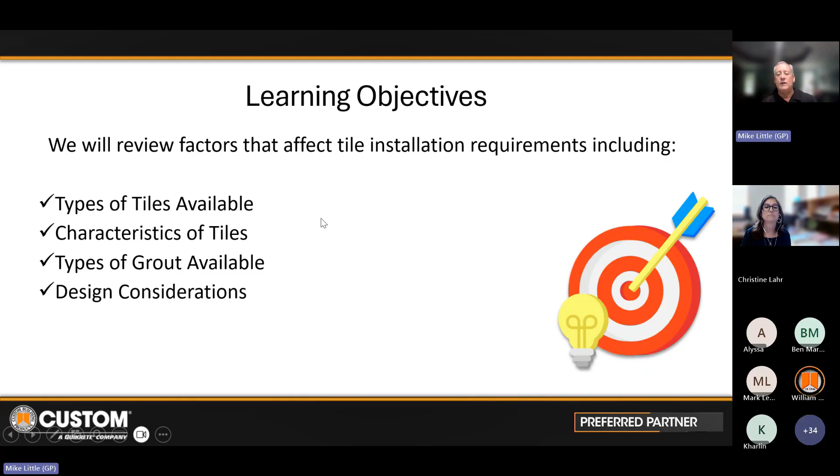For registering, you should receive a certificate of attendance. Some of the learning objectives we're going to take a look at are the types of tiles available to you, the characteristics of those tiles, the types of grouts available to you, and design considerations you might want to keep in mind as we go through these programs.

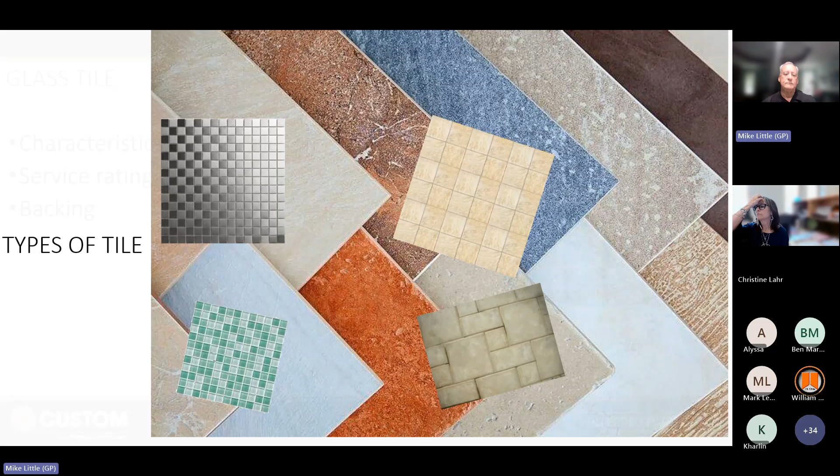One of the neat things about designing with tile in particular is that you have an almost unlimited palette to work with. You've got different textures, different colors, different styles, different materials. That's a great medium to put together. But in some cases, not all of the materials are installed exactly the same way. So I'm going to take a look at glass tile first, because glass tile is one of the more difficult products we have to install. And that's because of the characteristics that glass tile has.

First of all, just like porcelain tile, glass tile is impervious. That means it doesn't absorb any moisture. And it's also usually poured in a molten form into a mold, which means it's got a very smooth texture. That means it's going to be difficult for our bonding materials to grab onto it. So we need a very strong bonding mortar.

Another characteristic of glass tile is that it's very susceptible to thermal conditions. Let's say you've got glass tile in a shower and you turn on the hot water. That glass tile is going to want to expand very rapidly, sometimes more rapidly than the materials around it can absorb. So now we need a mortar that has some sort of movement to it.

But here's the catch. With a standard cement-based mortar, the tendency is as it cures, it shrinks. So sometimes when you're installing a large format glass tile, like a 6x12 or something of that nature, the mortar is so strong, and then when it shrinks, it has a tendency to put pressure on the outside of the surface that can sometimes cause crazing. And often that crazing isn't really noticeable until they go to grout.

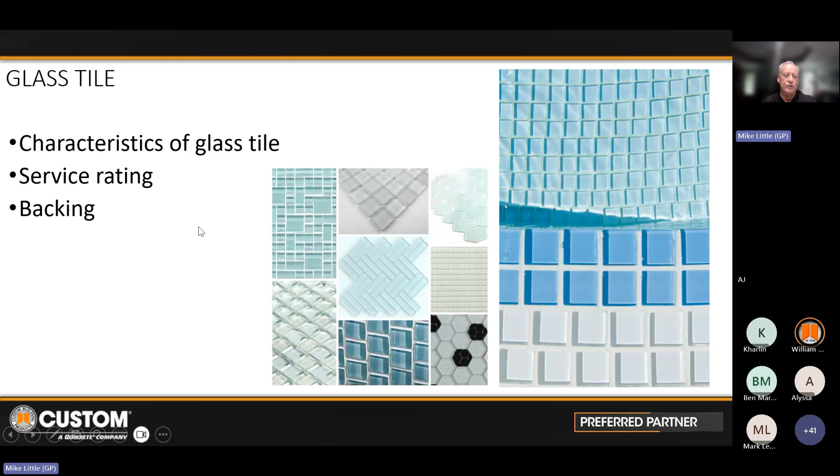One of the questions that will keep specifiers out of trouble is to find a sales rep who is knowledgeable and gets back to you quickly, and ask them: can this product be used in this manner? I can't tell you how many product problems would be avoided had that question been asked.

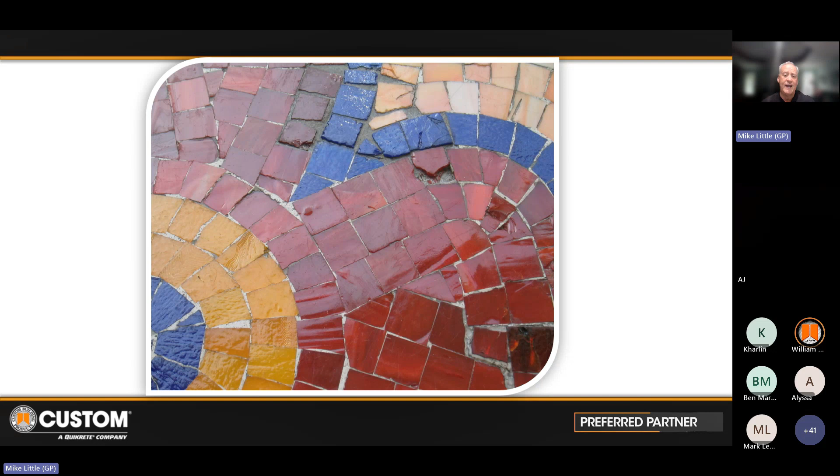Here's another one that has an interesting twist to it. This is one of the cases where the standards don't really encompass what's going on here. The first question I usually get asked when I show this is, why in the world would the contractor install this way? My answer is that he didn't see it.

This is a large format glass tile, a 4x4 glass tile that's obviously translucent or clear, and it comes with a paper facing on it. The installer installs it, and if he doesn't get it bedded in properly, so he's got full coverage of the mortar on the back of the tile, he won't see that until he wets the paper down and peels it off the surface of the tile.

My suggestion is, when you have a clear or translucent glass tile, make sure somewhere in the instructions that the contractor back-butters each piece of tile. That's where he takes the flat side of the trowel, puts a thin layer on the back of the tile, and then combs it into the wall as well. That way, if there are any irregularities or gaps behind it, it won't show through the surface.

I said this one was an unusual case because here's the situation we have looking at it. The most important concern we have with bonding mortars in installations is, how much coverage are we getting on the back of the tile? In other words, how much of that bonding mortar is actually touching the back of the tile?

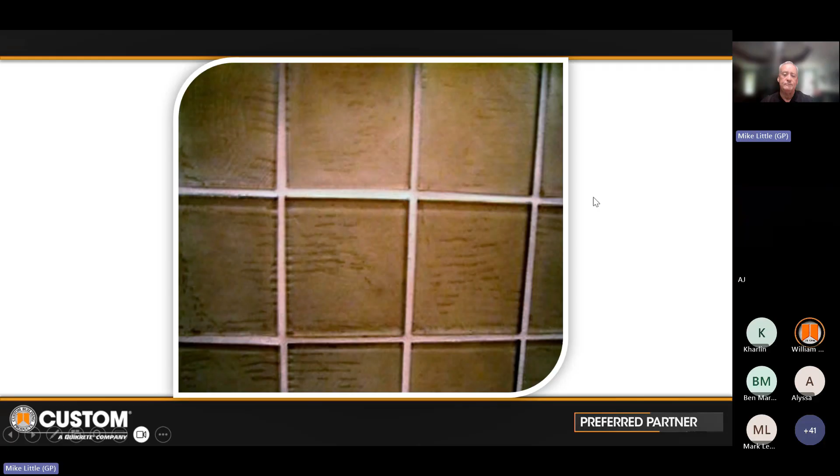Now we talk about backing on mosaics, and it shows up on glass tile, porcelain tile, and natural stone as well. The reason for mounting these tiles on a sheet is to allow the installer to install, usually 1 square foot or 1.5 square feet per sheet, as he goes.

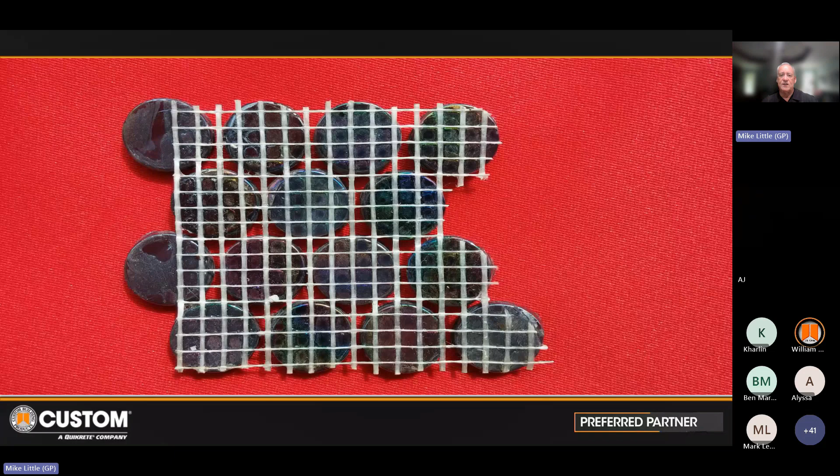But here's the catch: not every manufacturer uses the same mesh system or the same adhesives. For example, here's another type of mesh, and look at the middle tile on the left-hand side. You can see there are lighter and darker variations to that particular tile. That darker variation you're seeing on screen is actually the adhesive that was used to mount those tiles to the sheet.

Now, our mortars can't touch the back of that tile to hold it in place. So one of the things you have to do is increase the bond strength of the mortars you're using, to make sure you're getting a stronger bond where possible, because otherwise the installation is dependent upon the strength of the mesh to the tile, not the mortar to the bonding surface. So increase it—this would be a 118.15 mortar, or in some cases it might have to be a 100% epoxy bonding mortar. We'll talk about that in just a minute.

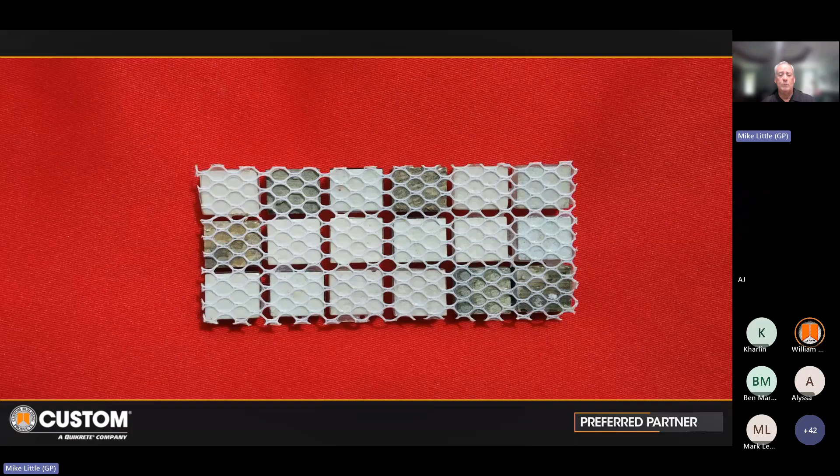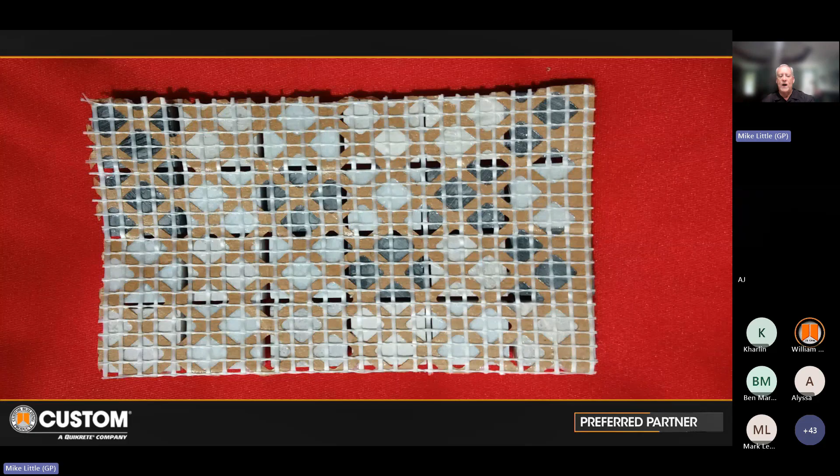Here's another situation we sometimes run into, and the first question I usually get is why they have two different meshes. Well, if you look closely, these are square edge tiles, and by using this double mesh system, it makes sure that no matter how they move the sheet, the tiles remain spaced appropriately for the grout joints.

However, can we achieve 95% coverage on this tile, where the bonding mortar is touching the back of the tile? The answer is no, we can't. So again, increase the bonding strength of the mortar you're going to use to accommodate the fact that we can't touch as much of the tile as we'd like.

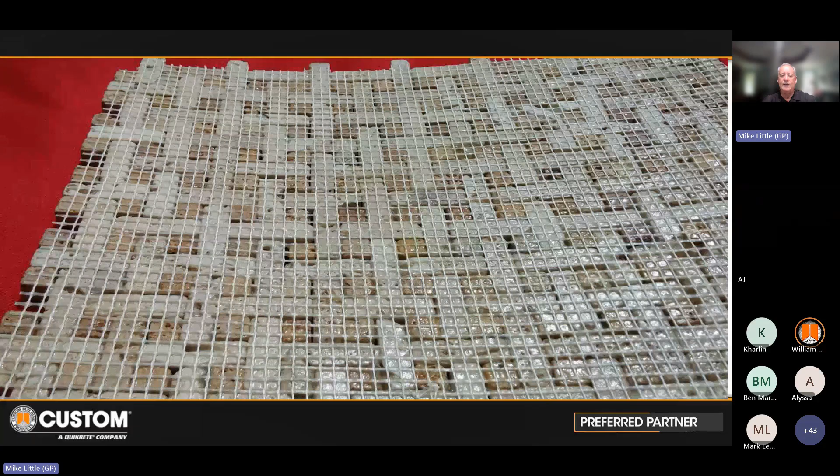Here's the worst case scenario. If you look in the bottom right-hand corner, you'll see a shine there. This is often an off-color white or cream color. In this case, the manufacturer is using a resinous-based material to attach the mosaics to the sheet. We can bond to that all day long, but it takes another resinous material, which in our case is a 100% solid epoxy bonding mortar. Our traditional cement-based mortars don't bond well to resins.

Now, the reason this is important is the cost differential. For a standard cement mortar, even a high performance one, the contractor is probably going to pay in the neighborhood of 25 cents a square foot. If he has to go to an epoxy bonding mortar, his cost on that material alone could be over $1 a square foot. In addition, a lot of contractors feel epoxies are harder to work with, and they charge a premium for labor. With modern mortars, that really shouldn't be the case, but a lot of people have been burned over the years, and that's just the way they cover themselves.

So if you're looking at a sample that has that cream color and kind of a gloss to it, the question you need to ask is, can I use a traditional cement-based mortar to install this tile? If the answer is yes, you're home free. If the answer is no, do you have the additional money in the project to afford what could be a $1 to $2 increase in the cost of installation? That's not something you want to learn on an RFI.

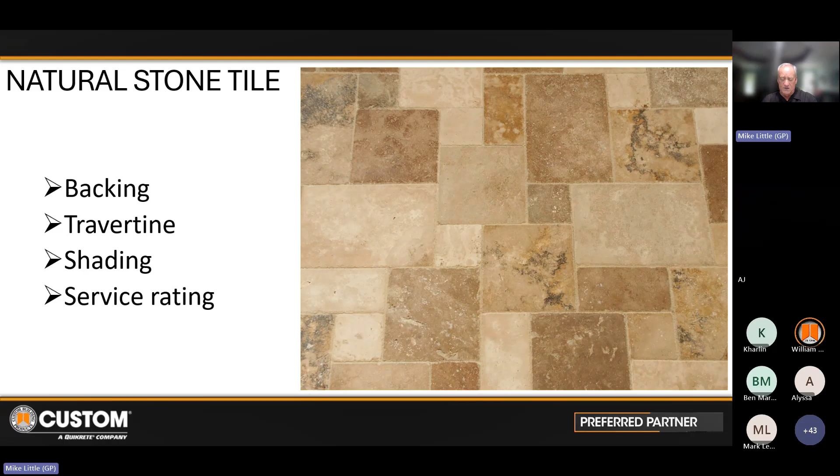Again, this is where a well-informed sales representative can come in handy: 'This is the stone I'm planning to use in this fashion. Will this be acceptable?'

But here's what happened in this particular case. Someone got to the owner—a salesperson got to the owner and said, put a sample board of his material and a sample board of what was selected side by side, and said, 'Look, these are almost identical, and I can save you—' fill in the number, on this particular project. Well, the owner didn't know enough to ask, okay, what's the chemical composition?

Because the stone he was choosing from had a very high iron oxide count. And as we all know, when you add water to iron, it rusts. That was the situation here. Had they gone with the original selection, it would have been moot.

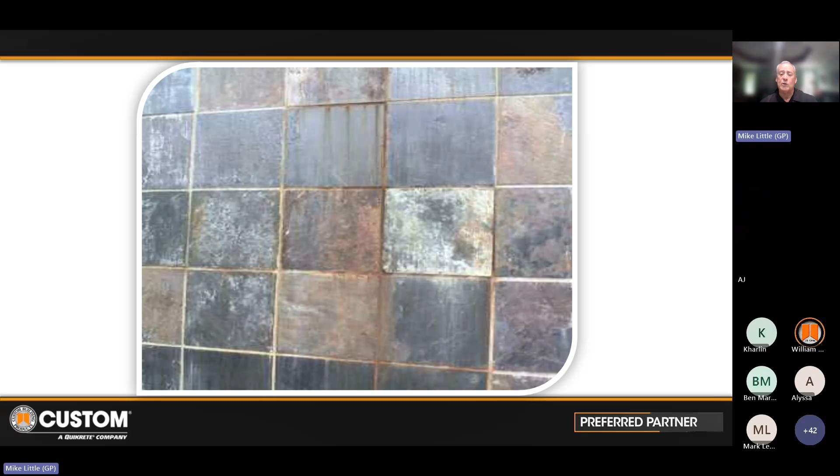But the other thing that should have been done in this particular installation is that all exterior installations require a waterproofing membrane. That stops the moisture from going in either direction. That wasn't obviously done, and that's what allowed the moisture to escape in the first place.

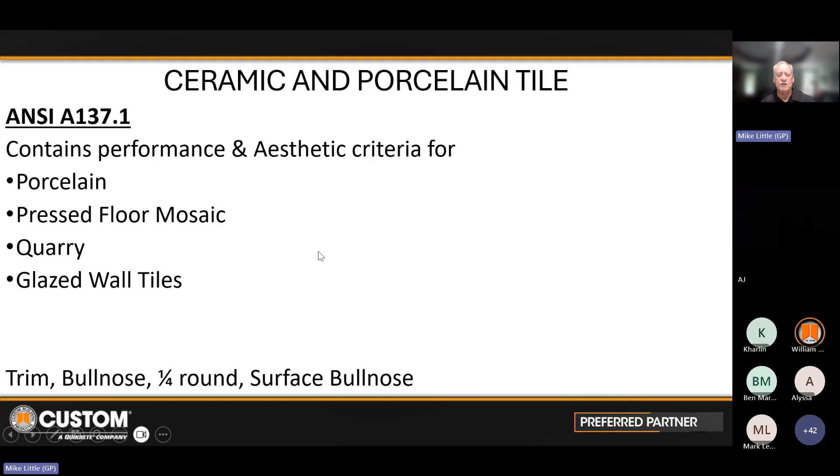Ceramic and porcelain tile are guided by ANSI A137.1, for the different qualities and performance characteristics of those different types of tile. But what I thought I'd spend just a second on is the trim situation and how it can affect an installation.

He noticed there was a slight difference because of the cutting effect, and decided to paint it. Not a wise choice. A piece of bullnose would have been very nice, or even a metal transition piece would have been a much better option than trying to paint it to match.

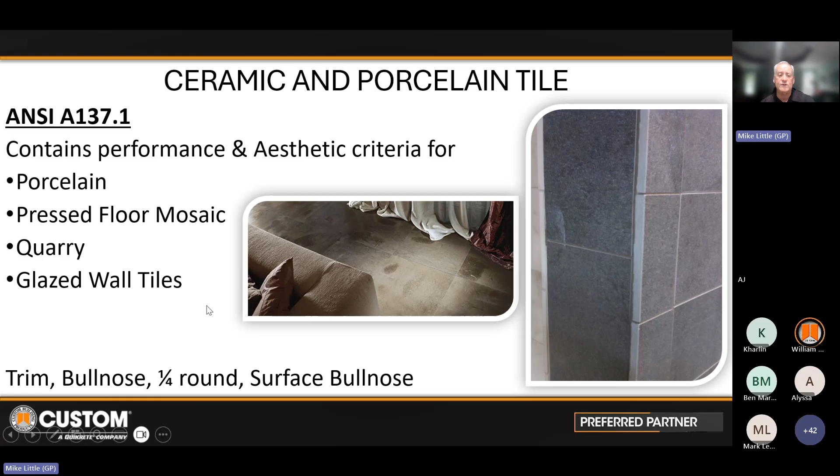And here's a case where they did an awful lot of this use of trim correctly. Number one, they're using a cove base.

A cove base is a base piece that comes down, rounds out, and meets the tile head on. In a lot of cases, this is required in food service areas, and the reason for that is that if you take a mop along that cove base, the mop will actually ride up and clean that out completely. Had that been a straight wall down to the floor, there's an edge in there that you can't get to unless you use something like a toothbrush. So they did that correctly.

Then they used an outside corner to member the two bases where they come together. Again, that's a good use. Not only does it have an impact on the appearance, but it also makes it a much sturdier situation, because porcelain on that rounded edge is harder to chip than the edges that are exposed above it.

But what they didn't do is continue with trim in either a metal transition piece or an actual bullnose piece on that wall going up, because it would have taken that grout joint from that huge grout joint you see down to the grout joints that are on all of the other tiles. It would have been a much more professional installation.

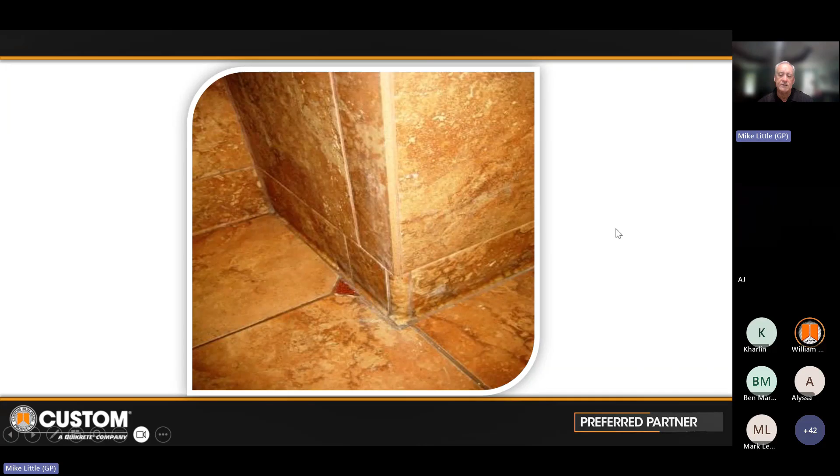As the tiles became larger and larger, we started dealing with issues that we didn't have to in the past, and one of those is warpage and lippage. One of the first things we noticed is as the tiles got larger, particularly pressed tiles, they were typically just a little bit thicker in the middle than on the ends because of the way the press and the pressure was applied.

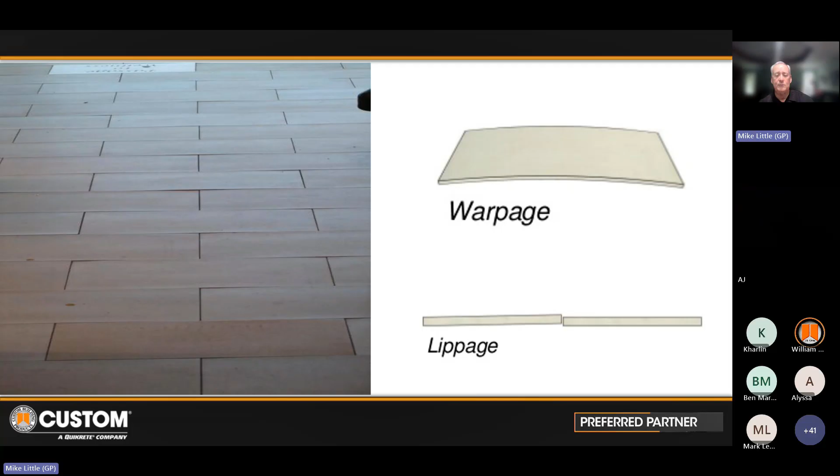What we were getting when there was a 50% offset or a brick joint pattern was you're at the high point of one tile and the low point of two tiles. So one of the changes ANSI made is they said when the tile is more than 18 inches on any one side, you can't go more than a third of the way into the next tile with that grout joint, because it minimizes that high to low transition. That's one of the most important changes they had to make, along with the flatness of the substrate.

Metal tiles can create their own bonding problems. The reason for that is just like there are different kinds of tiles, there are different kinds of metal tiles. There's a manufacturer out there who takes a porcelain body and wraps it in metal. Well, we're essentially installing a porcelain bodied tile, and we do that all day long. That's not going to be a problem.

But there's another manufacturer out there that takes a resin body, pours the metal filings into it, puts it into a mold. The metal is heavier than the resin, so it sinks to the bottom. They let that cure, and then they polish the surface when they take it off. However, we learned earlier that resins are hard to bond to.

Well, in this particular case, I'm going to say go back and ask for the manufacturer's recommendations, because they are all over the board when it comes to metal tiles. I've seen some say always use epoxy, never use epoxy. I've seen some say use a standard cement mortar, don't use a standard cement mortar, and one manufacturer even recommends using liquid nails as the installation material. So ask the manufacturer's recommendations—they should know how best to install their products.

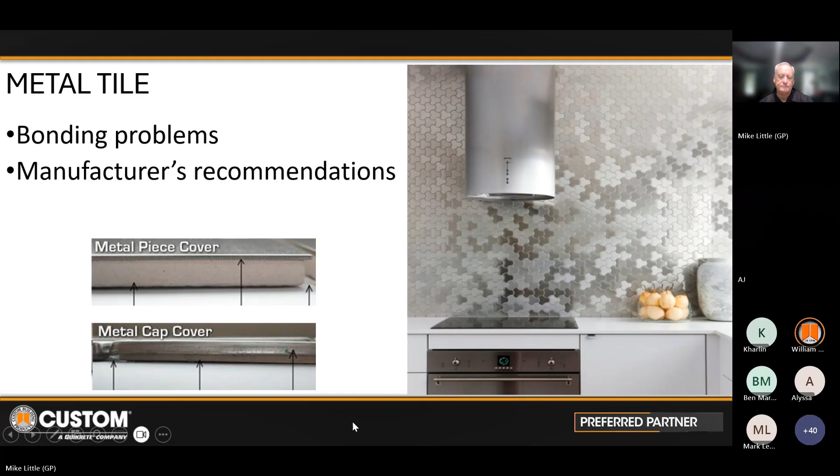Thin tile. Manufacturers have been on this quest to make tile as large as they can, and they've succeeded in making tiles that are 5 foot by 10 foot in size. They're much thinner, made with a different manufacturing process, but it's a tremendous design material that designers are frankly crazy over. It's particularly good for an exterior application because of the size of the unit, resembling a natural stone when it's in place.

Now, one of the difficulties we had when we first started encountering these was how to install them properly. Well, thankfully, ANSI published in 2017 ANSI A108.19 and .20, which are the installation guides for exterior and interior installation of these thin tile panels and slabs. The materials themselves have their own standalone standard, A137.3, which tells you how uniform they have to be, the breaking strength, etc. So you now have the ability to just specify, when you have large panels on a job, those particular ANSI standards, and it covers both the installation and the material itself—making it a much easier product to specify from that regard.

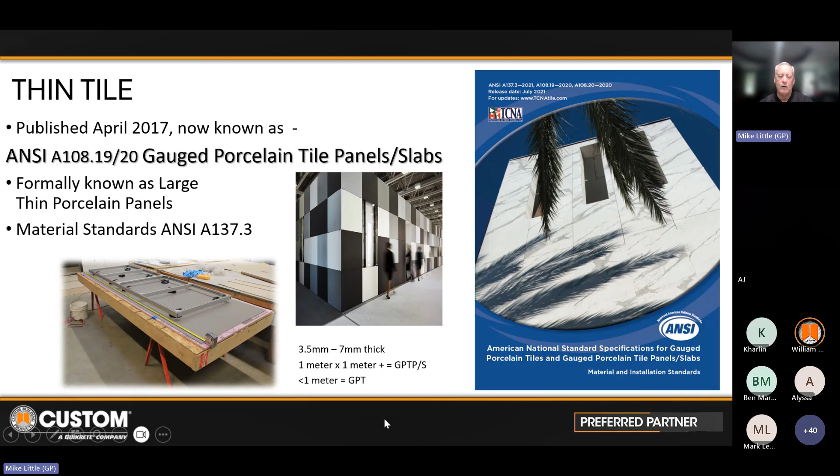And this is a great picture. This shows you the coverage that you need to get on these thin porcelain panels, and it actually shows you how effective it can be. There is a technique to it. We have training videos on that, and we sometimes do training schools for the installers. But the fact is, it's not installed the way a traditional tile is. So make sure if you've got thin panels being installed on a project, that you have someone who has experience with that particular type of material, because I can promise you, if they try and install it the same way they've installed everything else, it will fail because it's just not the same kind of product.

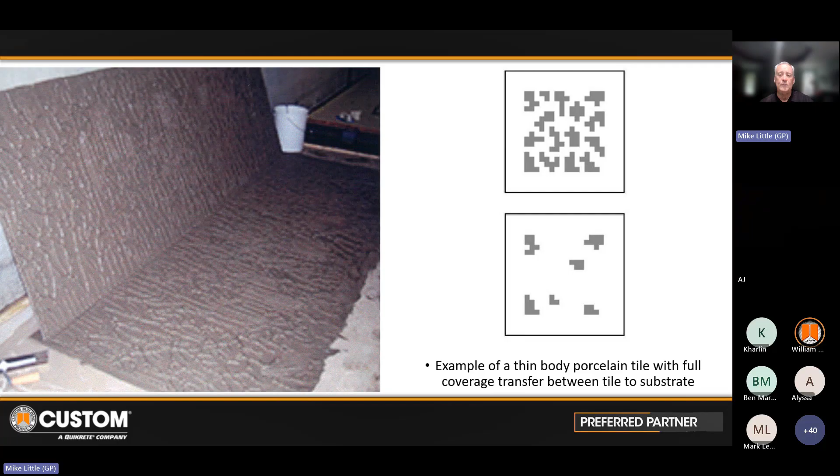Size of tile, large format tiles. ANSI, when the larger tiles started making their appearance, had to come up with some standards. And the first thing they had to decide was what is a large tile? Their definition is any tile that has 15 or more inches on one side. So a 16-inch by 1-inch accent strip is a large format tile, according to that definition. So we have to treat that differently than we would anything else.

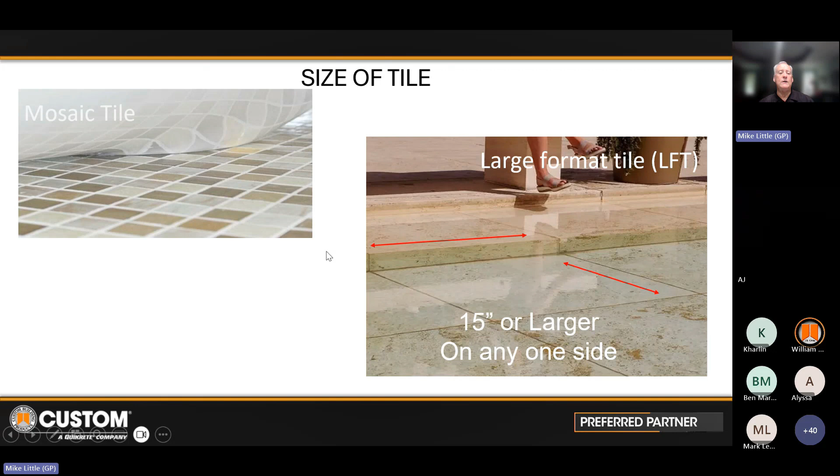The biggest change with large format tiles was that the surface had to be flatter than we were used to. Up until the advent of these larger tiles, the standard requirement for flatness of the substrate was 1/4 of an inch in 10 feet. Well, with these larger tiles, because tile doesn't bend, it's a hard surface material, it has to be a lot flatter in order for the installer to work efficiently and effectively and avoid lippage with the tile itself. So it's now half of that, 1/8 of an inch in 10 feet. And I don't know how many job sites you've been on, but I don't see very many installations that meet that without some kind of remedial work.

It should be expected that if you're using a large format tile on a walk surface, that there's going to have to be some kind of remedial work in order to get that to the flatness that's required.

Now we're dealing with mosaics. Well, we've been dealing with those for quite some time. That doesn't pose too much of a problem for us.

And the wood plank style. One of the things I will tell you with the wood plank style is that they have a tendency to bow quite a bit. This is a case where the spacers that actually clamp down and provide a certain pressure until that bonding mortar has a chance to cure are invaluable. I would require the use of mechanical spacers of one type or another. There are several different methods out there if you're installing a plank tile that's porcelain.

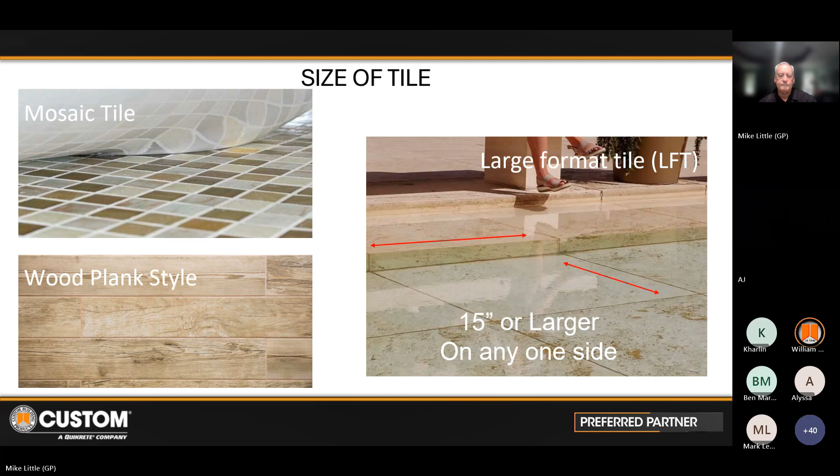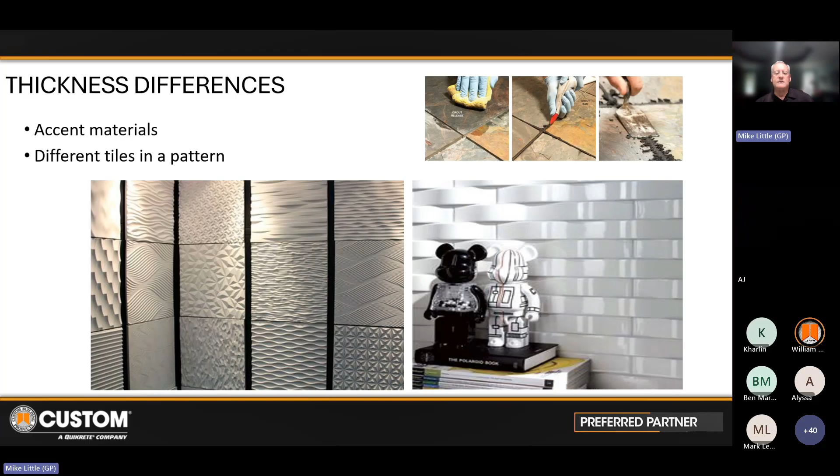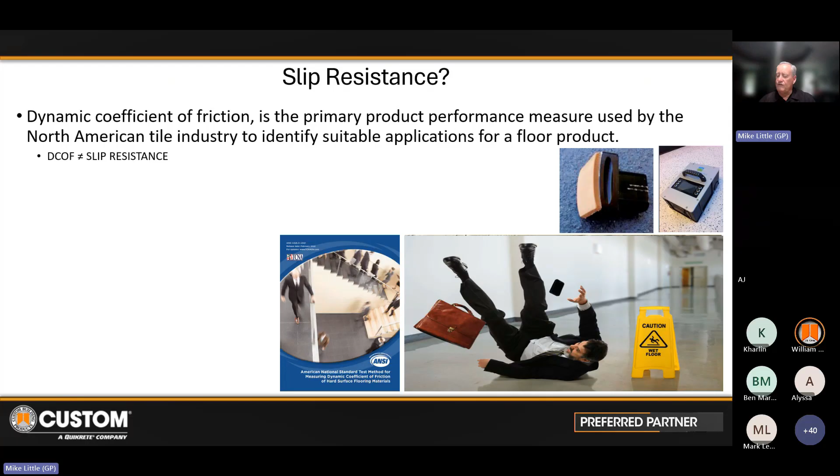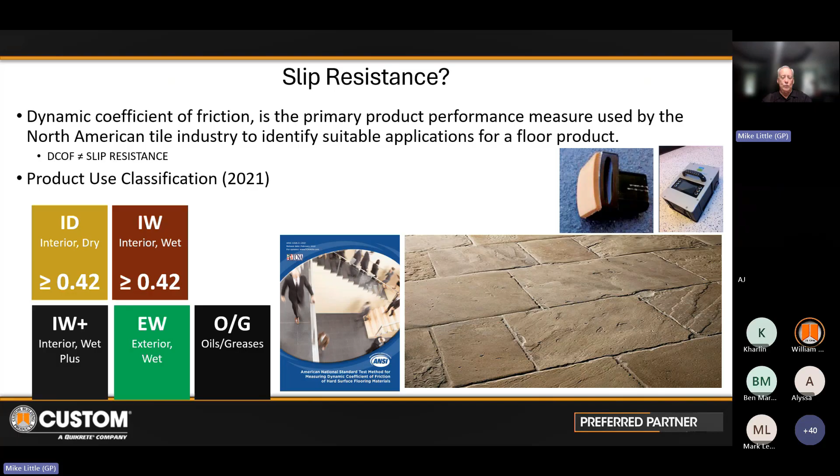Slip resistance. Dynamic coefficient of friction is an extremely important part of any tile installation. And if it's important during the design process and the installation process, it's important to know what that floor has to do. And that's been made easier because the Tile Council has come up with ratings: interior dry, interior wet plus, exterior wet, and oils and greases. They should indicate which of their tiles fall into which of these categories. Makes it easier from a product selection standpoint.

Now, to make it even easier, they've developed these criteria to give you an idea of what they mean by interior dry.

In this case, it's in indoor shopping malls, hotel lobbies, office buildings, and showrooms. Interior wet, meaning probably intermittent wet, not constant wet, would be entry foyers, public restrooms, grocery stores, front of house dining areas. Those are all areas that could get wet on an intermittent basis.

Interior wet plus would include wet areas like public showers, interior pools, locker rooms, covered exterior areas. We know those are going to get wet. Exterior wet are pool decks, patios, walkways, and sidewalks.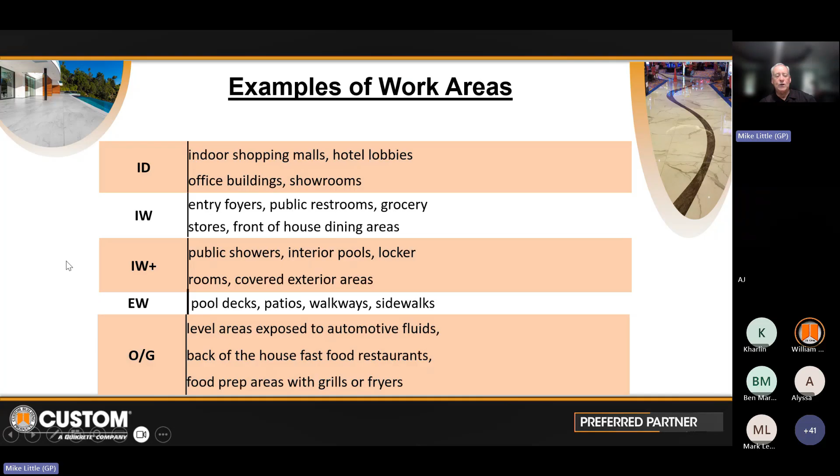And oils and greases, as you might expect, are primarily either in automotive or restaurants where you're exposed to a lot of grease and or automotive fluid. So these will help you determine which category the tile that you're selecting falls into.

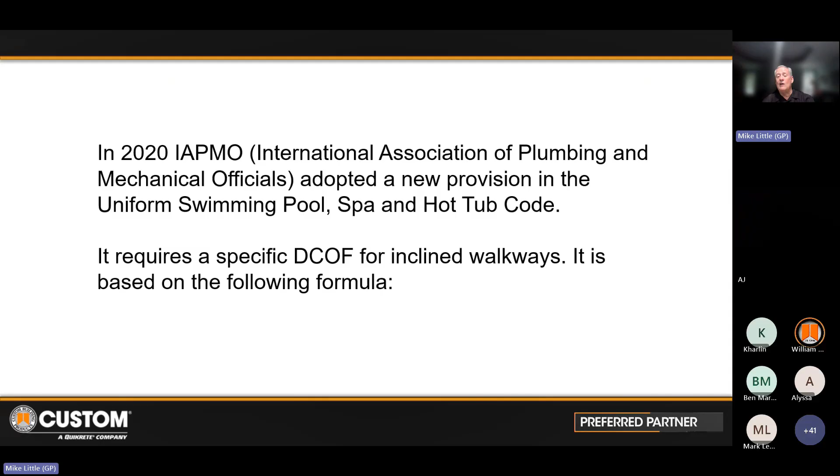Now, I'm going to tell you about something new. In 2020, the International Association of Plumbing and Mechanical Officials adopted a new provision in their Uniform Swimming Pool, Spa, and Hot Tub Code. This is the first standard that requires a specific dynamic coefficient for inclined walkways. Everything else is the DCOF formulas that you see are based on a level surface expected to get wet. Now we're talking about an inclined walkway, and they've developed a formula for determining what that dynamic coefficient of friction should be. And this is the formula.

And I have no idea what this is saying, but we have a lot of very smart people in our lab, and I sent this to them. And what they did is they developed a cheat sheet for me where I can put in the angle of slope in degrees, and it will calculate the dynamic coefficient of friction the surface needs to have.

And they're starting out at a 0.42 minimum, so it's going to go up from there. I used this sheet and did some calculations. A 1 in 12 slope is about the most that the Disabilities Act will allow. That slope plugged into the equation you're looking at comes up with a 0.64 minimum DCOF. So if you've got an outdoor ramp that has tile on it, that has an incline, then it's going to have a tile that meets that 0.64 minimum.

The reason I'm pointing this out is that right now it only applies to pools and hot tubs. But every time I've seen a standard that was duplicatable, that was objective, it's been incorporated into other standards. So I expect that you'll see this in other standards as this becomes a little bit more prevalent. I think it's a great way for determining what tile should be used for the safest walk surface on a walkway.

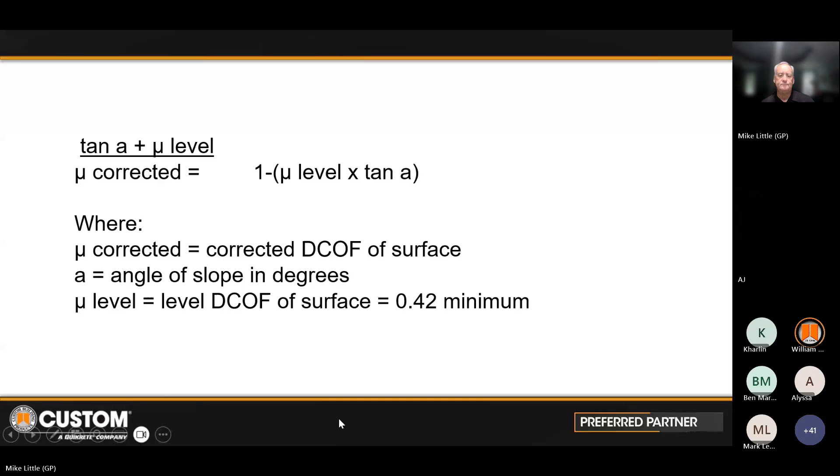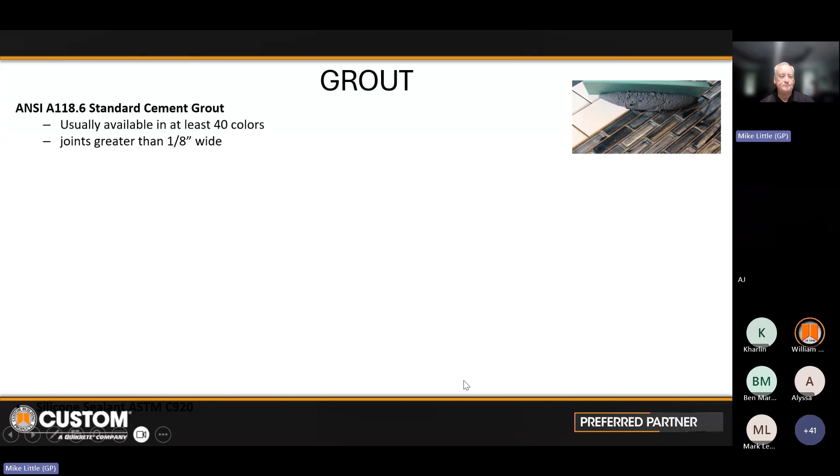There are a lot of different choices for you in grouts available today. One of the most common is ANSI 118.6, a standard cement grout. It's great for joints wider than 1/8 of an inch. The high performance cement grouts was an improvement over that grout, and it did two things. Number one, it could be used in joints anywhere from 1/16 of an inch to 1/2 an inch, which required the installer to just have one grout on the job rather than one for small joints and one for larger joints.

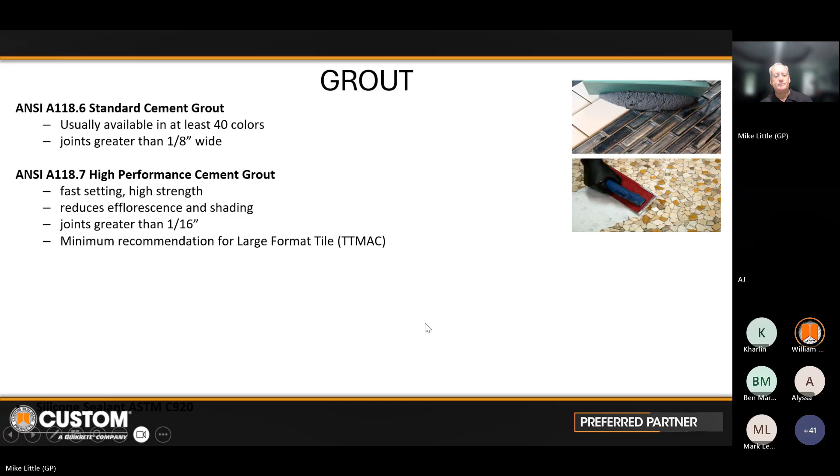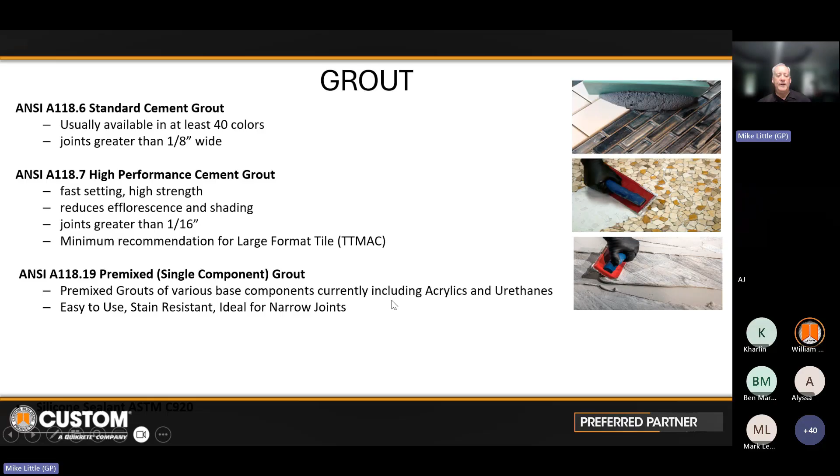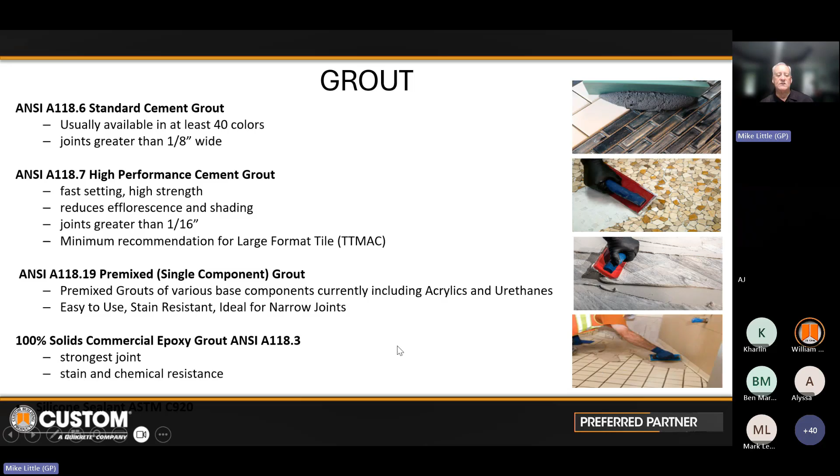A new variation has been the premixed or single component grouts. These are various base components, acrylics, urethanes. They're easy to use, stain resistant, and ideal for narrow joints. And then the old standby, the old grout that was considered bulletproof to some extent, was the 100% solids epoxy grout that met ANSI 118.3. This gave you the strongest grout joint and the most stain and chemical resistance that was available at the time.

So let's look at the 118.6 grout. It was a mixture of cement, fine sand, and water. Most of the time it was mixed with whatever was on the job site, and the color was dictated by the sand or the cement colors. It's one of the reasons gray was the most predominant color back then. Pigments weren't added until quite a bit later.

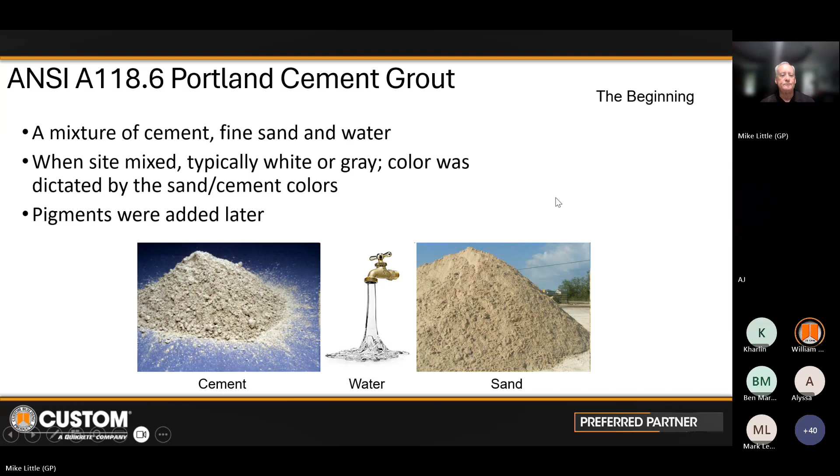The first generation of latex additives were added to both sanded and unsanded grout versions, and these came in a milk jug, it looked like a jug of milk. When added to the proper percentage to the dry materials, it improved physical strength, color retention, and lower water absorption. However, the latex was the most expensive part of that installation, and some contractors figured maybe they could water it down a little bit and make it go further. Well, that affected both the color and the strength of the material itself.

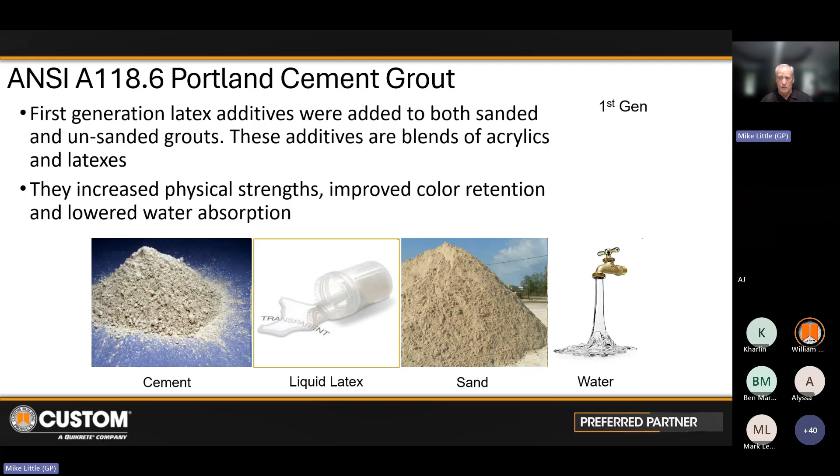So in the next generation, we used spray dried polymers instead of the liquids, and we add those at the factory, so that now all the contractor has to do is add the proper amount of water, and he has the product performing as it's designed to.

High performance cement grouts, because they use calcium aluminate rather than cement, don't develop the capillaries that cement sometimes does. That's the reason high performance cement grouts can really make an impact, particularly on exterior installations, regarding efflorescence. The efflorescence doesn't transmit through that particular chemical bond. So if you've got a porcelain tile and a high performance cement grout meeting ANSI 118.7, you've got a good combination that's not going to allow efflorescence to damage that installation.

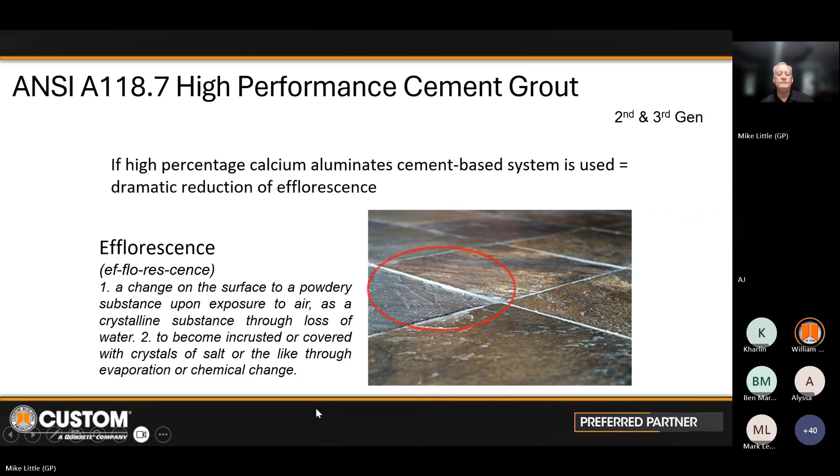Pre-mixed grouts are the newest variation that we have. And in my opinion, pre-mixed grouts are as close as we've come to the perfect grout. It's highly stain resistant, in some cases it outperforms epoxies. There are no sealers required because the stain resistance is built into the chemical composition. It's also an antimicrobial grout, so it's going to help repel microbes.

And it's actually the only grout we have that, if it's not completely used, comes in a plastic container. It can be sealed up and has up to a 2-year shelf life, so you can actually reuse that material later. With all the other types of grouts, whatever you mix has to be used at that time or thrown away, so this is a much more effective grout.

And it requires no water. It's very, very color consistent, and the reason for that is the color is determined by the manufacturer, not up to someone mixing it on the job site.

One of the biggest problems we had with grout for years was color consistency, because different people were mixing up the water usage in grouts differently. Contractors kind of like their grouts to be soupy. Well, that's fine, except that it changes the characteristics in both color and strength. When they add the proper amount of water it was fine, but they often overwatered it, which changed it somewhat. And from person to person mixing the grout, there can be subtle changes too, which can affect the coloration. The premixed grout takes all of that out of the equation.

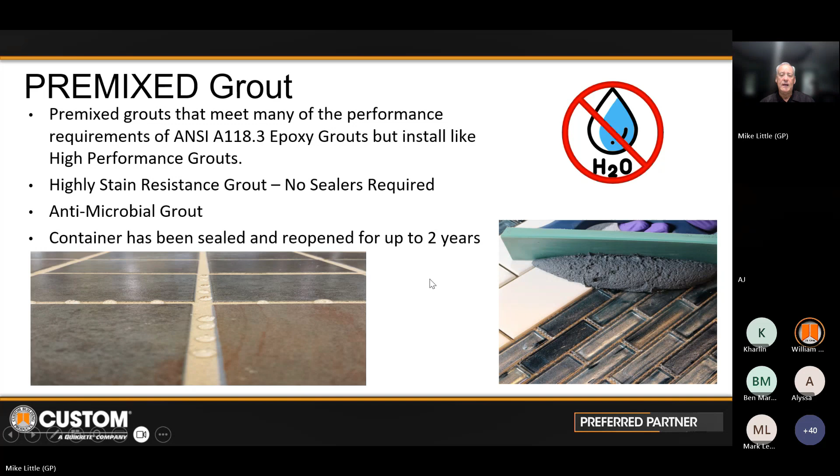And then we have 118.3 and 118.5 epoxy grouts. Epoxy grouts have traditionally been used in commercial kitchens and hospitals. They're highly chemical and heat resistant. They're usually 2 or 3-part systems, and they can also be used as mortars as well as grouts.

Now these are very specific areas of use, and you have to be careful which type of grout you're using, because in some cases you may need what they call an industrial grade, IG grade epoxy grout, which would fall closer to the 118.5 characteristic. The industrial grade is made to resist a higher concentration of the materials it's going to be exposed to.

And one of the things you have to worry about with epoxy grouts, for example, is what's the cleaning regimen, particularly in fast food areas. Fast food areas often use a cleaning agent called an enzyme-based cleaner. The way this cleaner works is they mop a thin layer of this cleaner on the surface of the tile, and it actually attacks the grease and food residues and breaks it down.

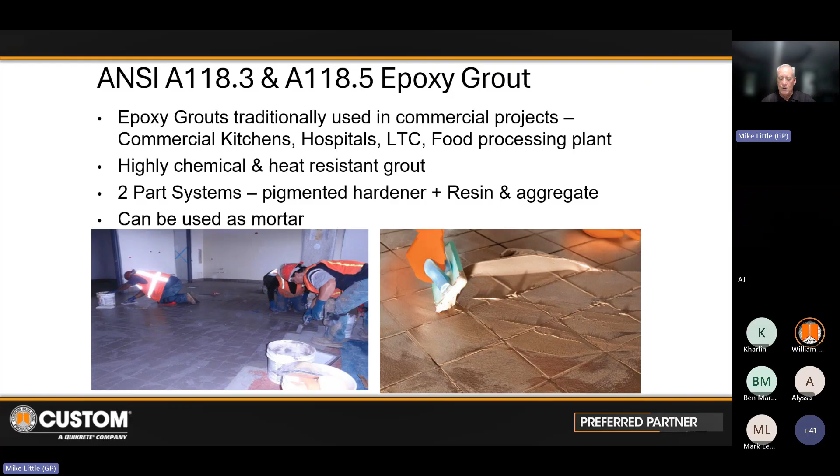But when it breaks it down, it forms oleic acid. That oleic acid, because it's attacking organic materials, can actually attack the epoxy grouts and soften them to the point where they're not effective. In one case, it softened it to the point where a broom would actually scrape it out of the grout joints. If you know they're going to be using an enzyme-based cleaner in a situation like that, you need to go to the IG variation of that grout, the industrial grade, because it's designed to withstand that increased acid exposure.

Grout joint size, sanded or non-sanded? Well, non-sanded was used from 1/16 of an inch to 1/8 of an inch. Sanded was from 1/8 of an inch to 1/2 an inch. There was a difference between the floor and wall. And we also had to be careful about polished tiles, because if you had a wider grout joint with a sanded grout and a highly polished tile or stone, the sand in some cases could scratch the surface of the material. So you had to be careful.

Now, we talked earlier about ANSI making some standards, and they had to revise some standards because of the larger grout joints or larger tiles we were using. And here's another change that they made.

As we were making these tiles larger and larger, we were making the grout joints smaller and smaller. ANSI realized there was a point of diminishing returns where the installer couldn't execute a grout joint successfully because of the tile he was installing. So they came up with a standard: the minimum size grout joint on any particular project with any particular type of material is 3 times the actual facial dimension variations of the tile being installed. Well, that cleared it up, didn't it?

Here's what it means. Let's say we're going to install 12 by 12s. Not all 12 by 12s are going to be the same size. You take the largest and the smallest that you can find on that project and measure the difference. Let's say it's a 1/16 of an inch. Then 3 times that variation is going to be 3/16 of an inch. That's the smallest grout joint that contractor can be expected to execute on that particular project.

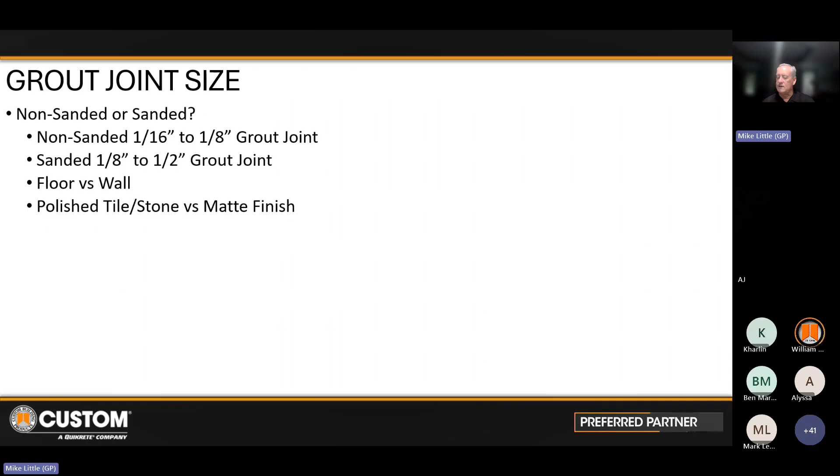The difficulty comes into play when you ask, how do you know that up front? Well, you don't, oftentimes. So here's my suggestion: most manufacturers are now giving you a recommended grout joint size. Don't go below that; use their recommendations. They know what works with that particular tile. It will save you a lot of grief, because as the designer you're the one acting to actually design this. And if you go below that standard of 3 times the variation, you might be responsible for any warpage or lippage that occurs.

Rectified versus non-rectified: the smallest grout joint anyone can be expected to execute, even with rectified tile, is 1/16 of an inch. Rectified tiles go through an additional process during manufacturing—after they're pressed, they go through a grinder that grinds two edges, then the tile is flipped and the other two edges are ground, making each tile as uniform as possible to the next. Again, the smallest allowable grout joint, even using rectified tile, is 1/16 of an inch. In other cases, that standard of 3 times the variation applies.

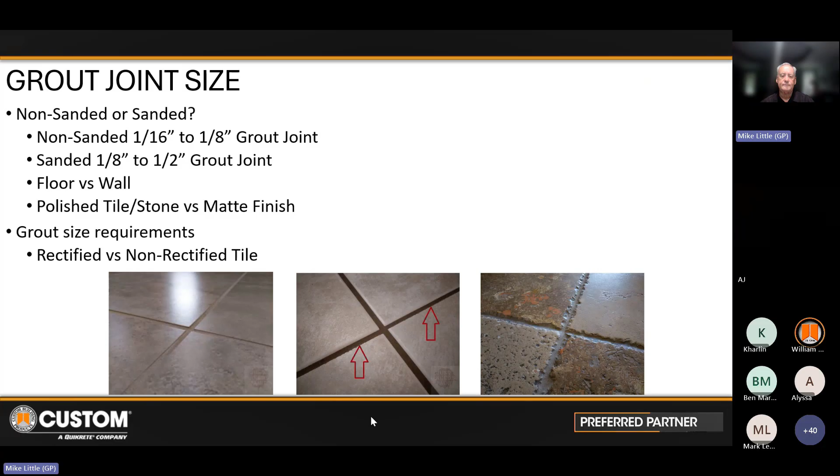I saved the worst for last, or the best, I don't know. This is the one that gets us into more trouble than anything else we've talked about, and that's movement joints. I've talked to a lot of different forensic tile consultants, and the first question they're going to ask on every project is, show me your movement joints. Because most of the time, if there's a problem with the floor, it has to do with a lack of, or not enough, or sometimes in some cases not any, movement joints that the tile requires.

Now there are 2 types of movement joints: movement joints for the tile itself, and construction joints, which bridge differences in the substrate itself. It could be as easy as concrete pours on 2 different days—there's a joint there. In that particular case, if it's in the construction itself, that joint has to come all the way through that assembly with a soft or movable joint. It can't be moved to one side or the other; it has to come up at that particular point.

Now, the movement joints within the tile work, you have some latitude. The requirement for movement joints in tile work is every 20 to 25 feet in any direction. So if you've got a 50-foot by 50-foot lobby, you should have an X or a cross, making that into 4 different quadrants to allow for movement to take place—even slabs on grade move—so that there's no damage done to the tile installation itself.

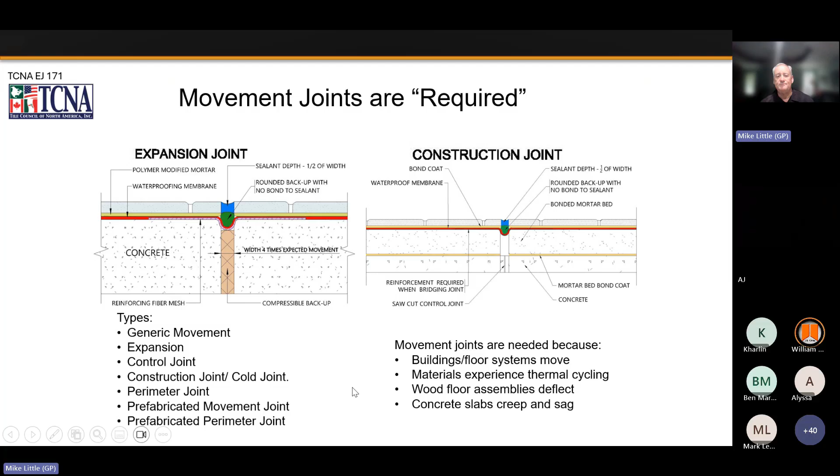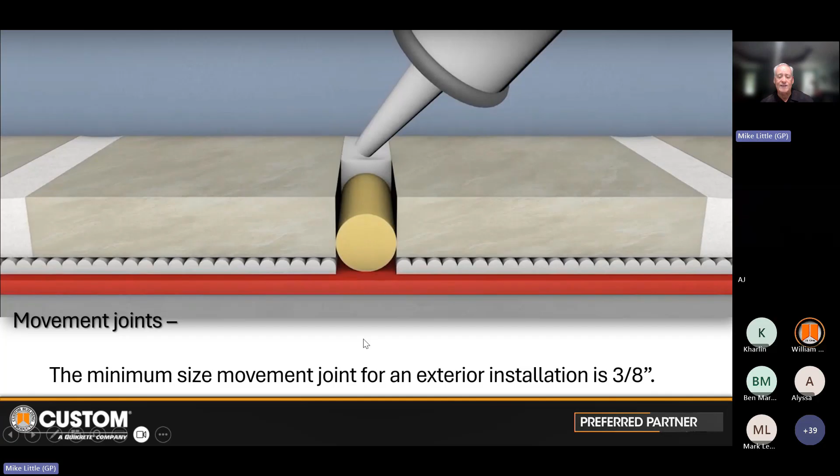When it comes to exteriors, the movement joint frequency increases, as does the size. Movement joint frequency on exteriors is every 8 to 12 feet, which is pretty close together. The minimum size movement joint for an exterior installation is 3/8 of an inch. It can go larger depending on the temperature changes of the installation and the material being installed, but that's the starting point for exterior installations.

Here we have exterior walls. What you see on the right hand side is a result of the movement that took place on the left hand side - you can see how it bowed out. That bowed out cementitious backer board. On an exterior application, a cementitious backer board is required; other types of backer boards are not suitable for exterior installations, so make sure they're specifying the right type. But what happened here is they didn't allow for any movement joints - they butted these sheets together, and because the building settled and gravity took its toll, it bowed that backer board out, and as you can see, it popped all those tiles loose. That's the reason we have movement joints that frequently on exterior installations, plus the fact that exterior installations are more susceptible to thermal conditions.

If you've got a dark tile on a sunny day, it's going to heat up tremendously. So these are the conditions we have to make allowances for when developing the movement joint system.

Just to make it clear, the placement of movement joints is up to the design professional - I'll say that again, the placement of movement joints is supposed to be done by the design professional. A good contractor, if they're not included on the plans, will come back and say, here's where I'm planning to put them, but it's not really his area to do that. It's the design professionals who are required to do that, because you know what your pattern is supposed to look like, etc.

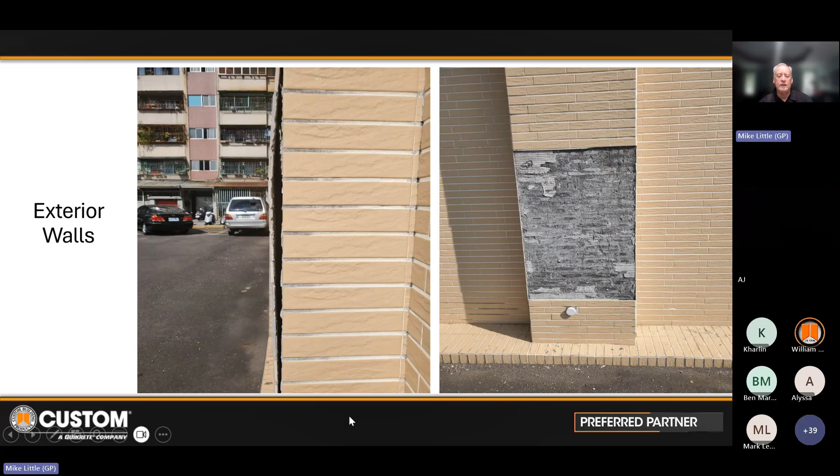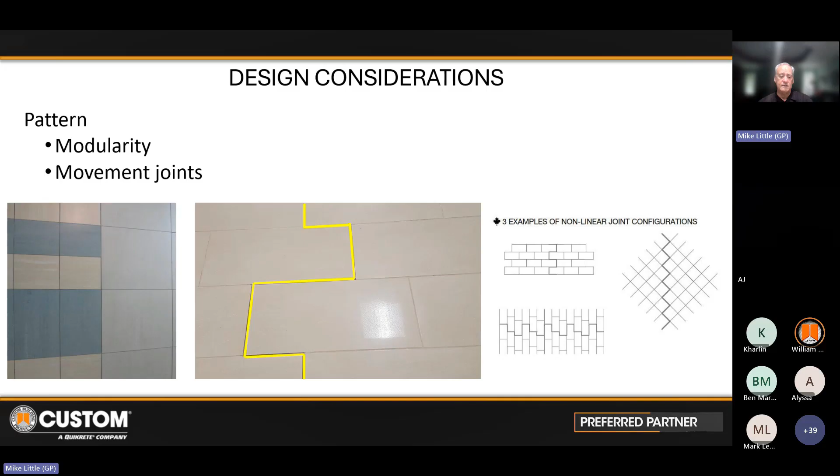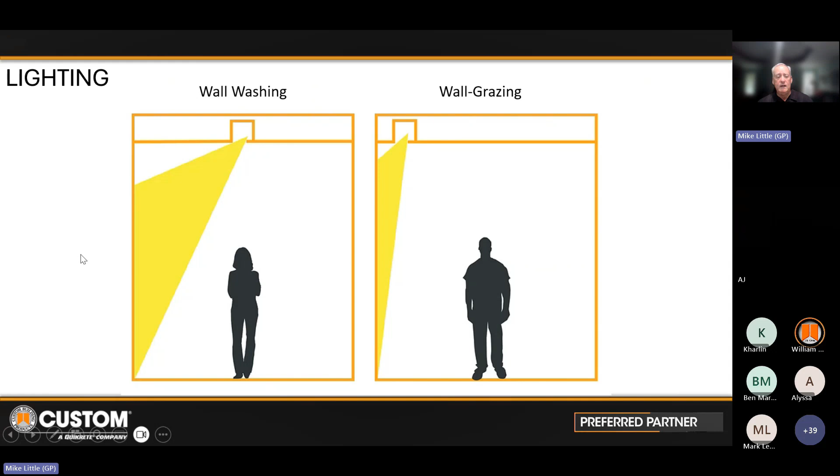It's the lighting that exacerbated the condition we were looking at. As you can see, the smaller the unit, the worse that lighting is going to make it appear, because it's picking up minute differences between the tiles as it goes through. Grout joints are typically concave a little bit, and it's accentuating the edges of those tiles. So that's a design issue, not an installation issue.

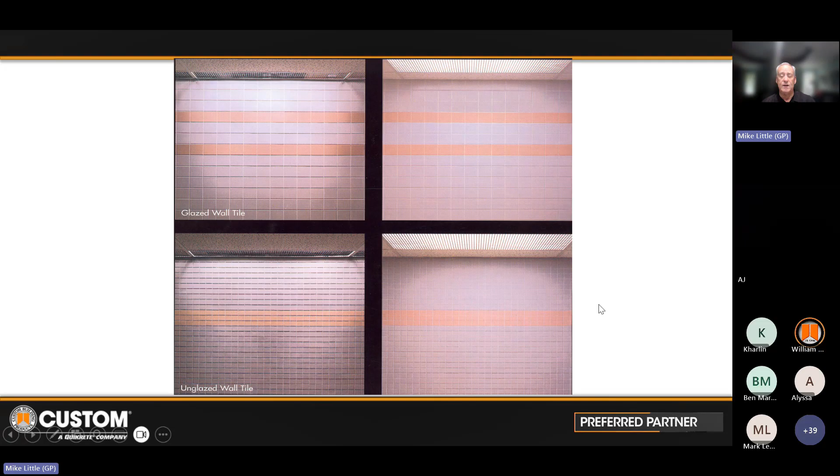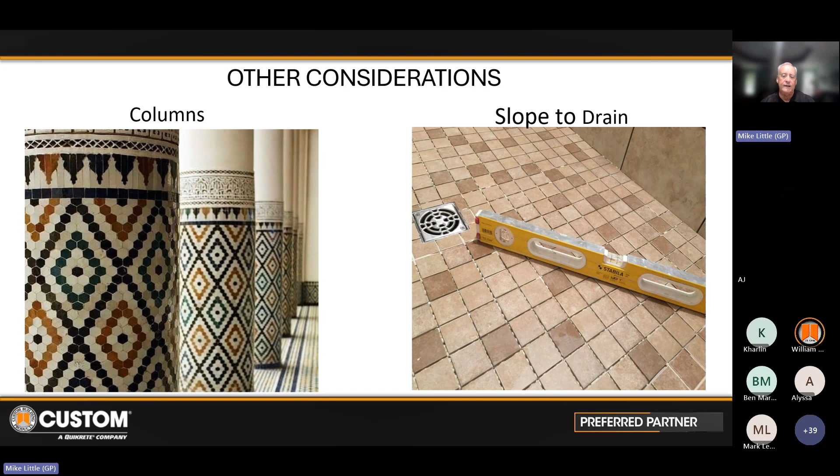The other consideration I have is when you have to tile a column or slope to a drain, I implore you, please use the smallest tile you can stand. Because when you try and use a large format tile sloping to a drain, contractors can get creative - they have to make it conform to the slope, which is 1/4 of an inch per foot, so they have to cut these tiles. Sometimes they do a halfway decent job of it, sometimes they don't.

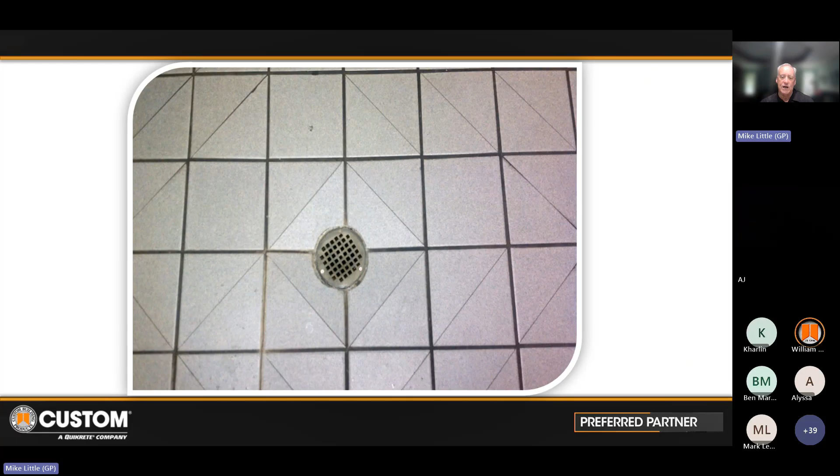But the fact of the matter is, there are things that can be done to help this situation. Number one, the use of a square drain by itself will improve the look of the cuts rather than a round drain.

If you're trying to use a large format tile in a situation with a drain, consider a linear drain. That's a drain you can put against any wall, and all we have to do is make sure the surface slopes to the proper degree to let the water and soap film evacuate. We don't care if the tile is level, we care that the tile is flat.

There are a couple instances, sloping to drains being one of them, exterior balconies being another, where we don't want it to be flat. We want it to slope toward the drain or away from the building. So consider a linear drain if you're trying to use large format tile in combination with shower situations that have drains. Theoretically, you could use a 5-foot by 10-foot piece of porcelain panel and have a single drain along one wall with no grout joints. Just consider that when incorporating those drains. The drains make a big difference.

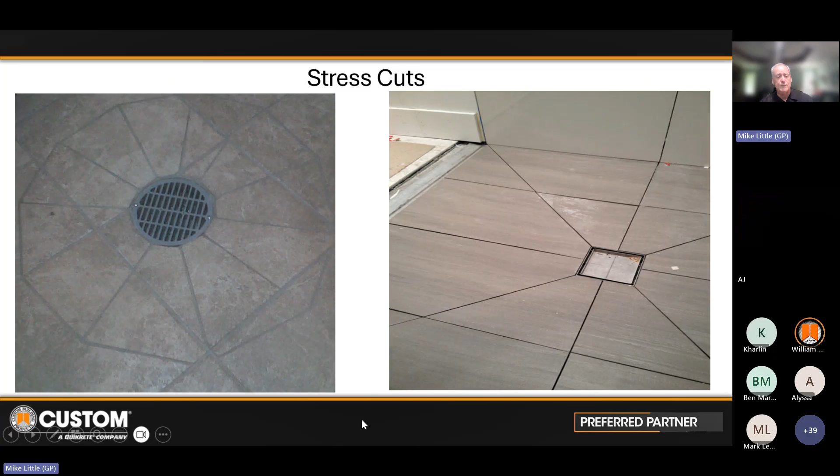Be careful, not all waterproofing membranes are approved for steam rooms. Make sure it meets the PERM rating required for steam rooms. Check the manufacturer's information, ask the question: is it okay to use this installation material in a steam room? We've seen a photograph of a steam room where they used an adhesive rather than a cement-based mortar, and the steam liquefied the mastic and everything just slumped off. So it's important to use the right materials for steam rooms and showers, and make sure it meets the ratings for both.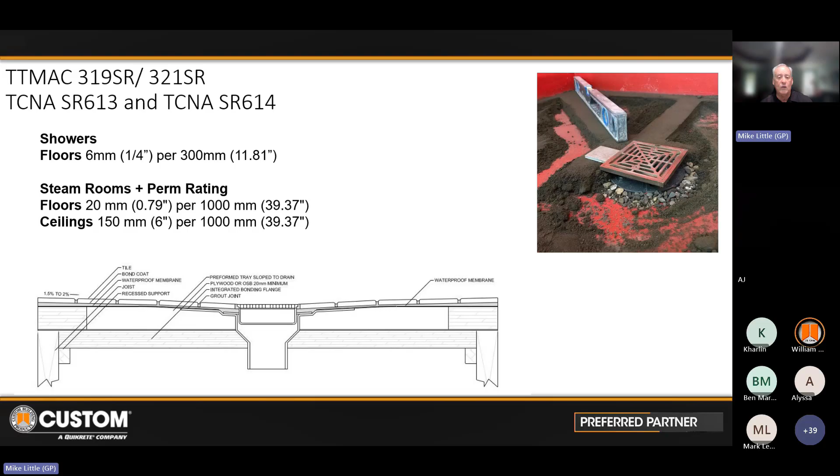The last thing we're going to talk about is maintenance. It's one of the areas that I think is often left off of discussions, but it's going to be very beneficial to the end users of this project.

Preventative maintenance: there are two times when the tile work is going to need protection. The first is when it's first installed on the job site—it needs to be protected from the other trades. One of the most difficult situations is where drywall dust gets into a freshly grouted floor; it's very difficult to get that out of the grout joints successfully. So it needs to be covered appropriately so the other trades don't damage what was already installed. The other time it needs protection is right before it's put into use.

You have a lot of different options available to you, but when we talk about protection, you want it to have the quality of soaking in, absorbing into the material. We don't want a topical protection because that wears off—you want it to be absorbed into the material.

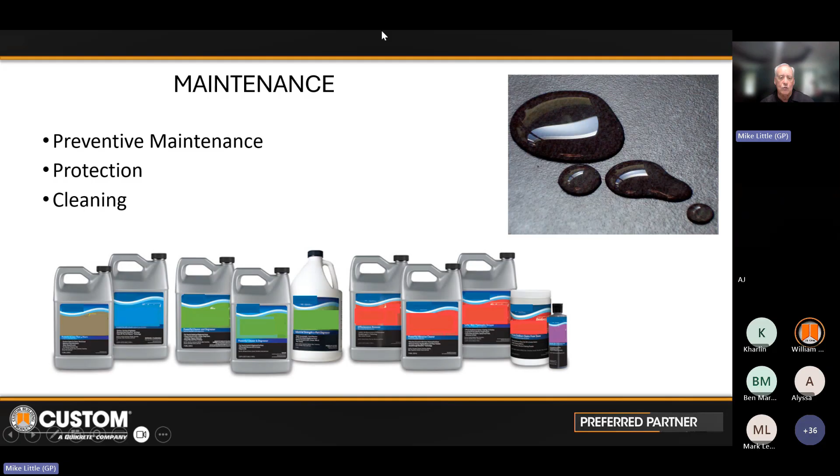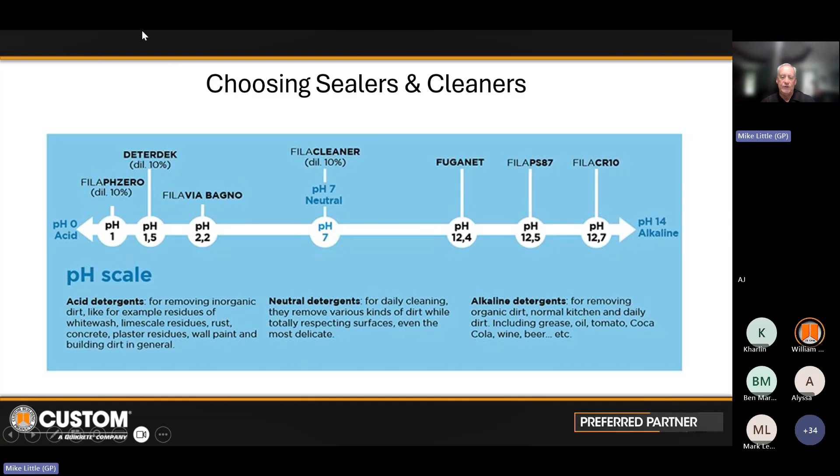Cleaning is another issue that can come up, and that's sometimes difficult because it's usually done by a cleaning crew. The cleaning crew may use chemicals that aren't compatible with our grouts in particular. We talked about enzyme cleaners on epoxies. What we want from an everyday cleaner is as close to 7 on the pH scale, or neutral, as possible. If we're trying to correct a problem, we may use something a little more acidic or alkaline. But for everyday use, we want something as close to that 7 pH as possible, because that allows cleaning to take place without doing damage to the materials, particularly the grout joints.